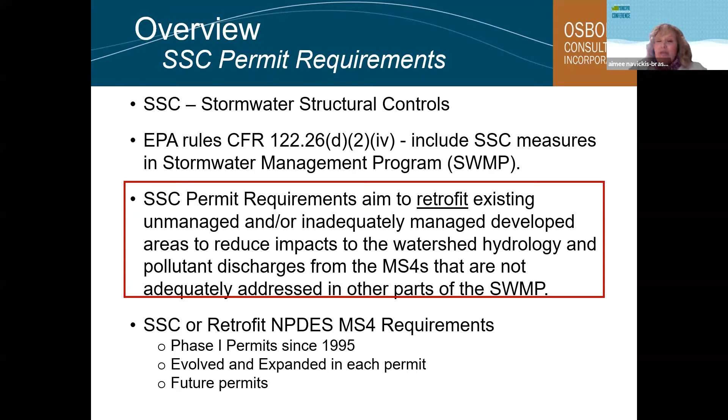So what are the SSCs exactly? There are 11 different project activity types that fall under this umbrella. These include new flow control facilities such as a detention pond, new runoff treatment facilities such as a biofiltration swale, new LID BMPs like porous pavement, and retrofitting of existing treatment and/or flow control facilities.

So retrofitting one of the three items listed there - a flow control facility, a runoff treatment, or an LID BMP. The first 4 SSCs listed are all ones you would find in the Stormwater Management Manual, which has guidance for developing them.

The other categories include number 5, property acquisition for water quality or flow control benefits, maintenance with capital construction costs greater than $25,000, restoration of a riparian buffer or forest cover area, some type of floodplain reconnection projects - as long as it's not to a flow control exempt water body - and permanent removal of an impervious surface.

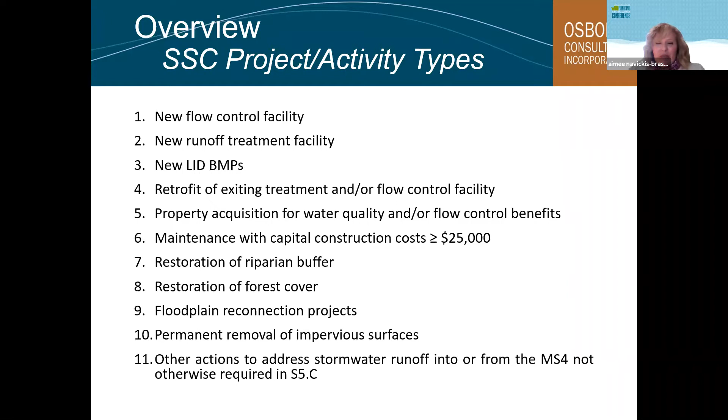And the last category is 'other.' Those are actions to address stormwater runoff into or from the MS4 that are not otherwise required by the S5C section in the phase 1 permit, which controls runoff from new development, redevelopment, and construction sites.

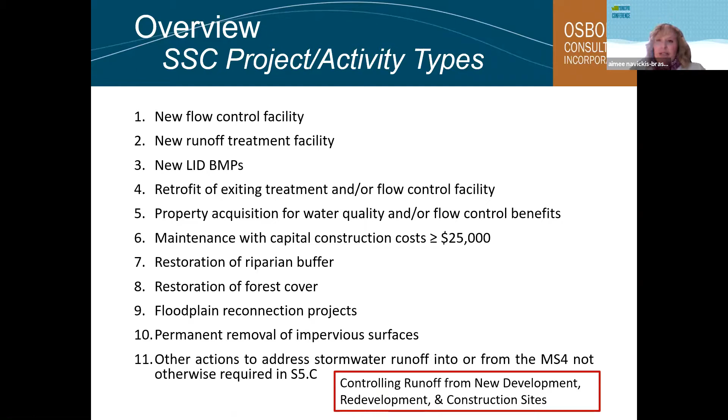So last slide on the background and overview related to SSC points and multipliers. In the phase 1 permit, specifically Appendix 12, there are requirements that define specific items related to the SSCs, including reporting instructions for how permittees are to document the work they've done to meet this requirement and the progress they're making each year.

There's also a section that defines the project types for each category, and provides some type of definition for each of them that includes a definition as well as eligibility for the different SSC requirements. There's also information about non-qualifying projects, which won't get you the points you need to meet your permit requirements. Most of these are activities that would occur below the ordinary high water mark.

And then there's instructions for calculating points. Specific to the project type, there's a multiplier that's applied, and then some type of measure, such as equivalent area, length, or area, is applied.

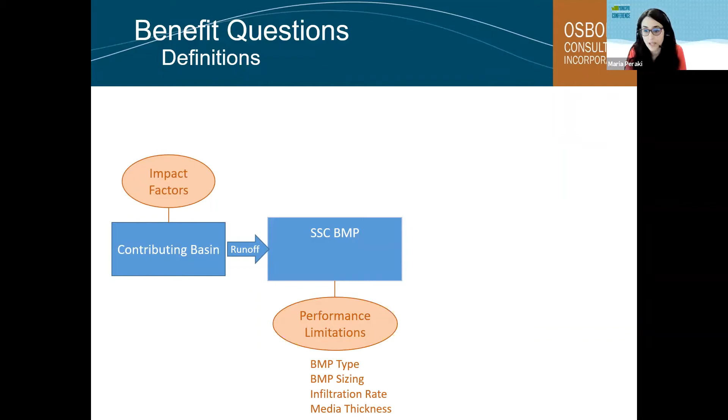The SSC BMP has associated with it certain performance limitations, and those could be the BMP type, the BMP sizing, infiltration rate for LID BMPs, and the media thickness. Those are just examples of the design parameters that could influence the stormwater-related benefit of the SSC.

Each SSC BMP involves certain mechanisms that are the flow control or treatment processes that provide the benefit. And those mechanisms can include sedimentation, filtration, adsorption, among others.

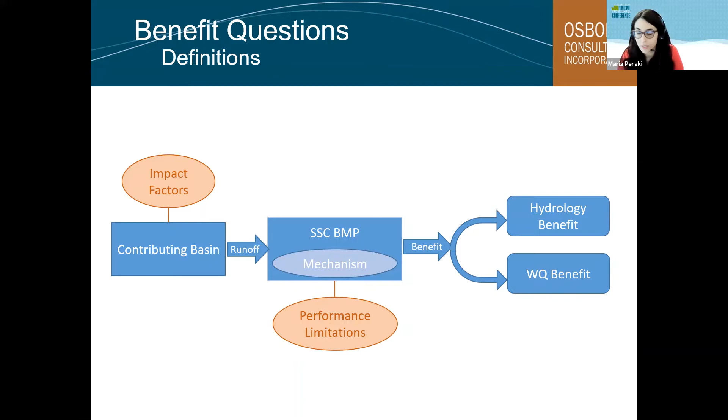The SSC produces a certain benefit, which then could be split into the stormwater-related benefit, which includes the hydrology benefit or the water quality benefit, or other environmental benefit, examples of which are groundwater recharge and air quality improvement. For the benefit, there are certain single or combined variables that can be used to measure it. For this analysis, we're going to be using performance indicators to estimate the stormwater-related benefit of each SSC.

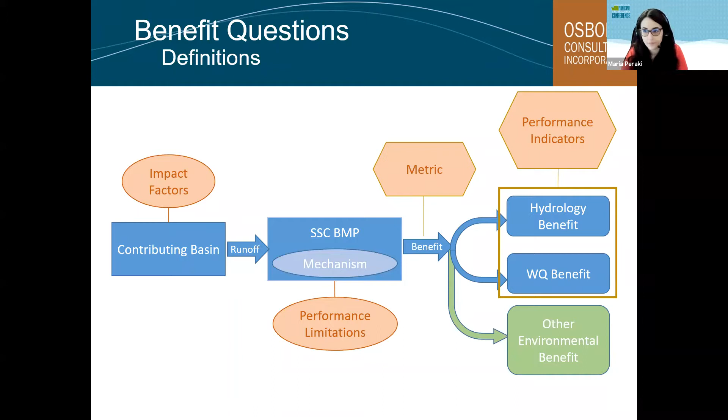Sorry, I'm one step behind you because I'm looking at the other screen. Next slide, sorry. That's fine.

The consultant team was asked to provide responses for 7 benefit questions split into 2 main groups. The first relates to the SSC stormwater environmental benefit, mainly defining and quantifying it. The second relates to metrics for the stormwater related benefit, revolving around metric applicability under different site conditions or impact factors, limitations of the metrics, single versus multiple metrics approach, best metric, and a potential approach for comparable benefit through metrics.

In order to respond to those questions, the consultant team conducted a literature search, and I'm going to outline the approach and findings in the next slides.

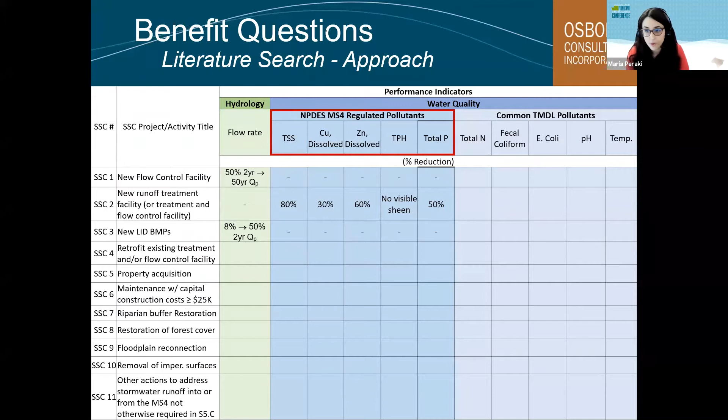In order to gather all the data for the performance indicators for each SSC, we created a table like the one we're showing here. We focused on performance indicators for hydrology and water quality, and split the water quality performance indicators into parameters regulated by the NPDES MS4 permit and common TMDL pollutants.

For SSCs 1 through 3, a decision was made after coordination with the TAC group to use the ecology-approved performance standards, the SWMM standards, and not perform a literature search for those parameters. The consultant focused the literature search effort on finding performance indicators for SSCs 1 through 3 for the common TMDL pollutants, and for all the parameters for SSCs 4 through 11.

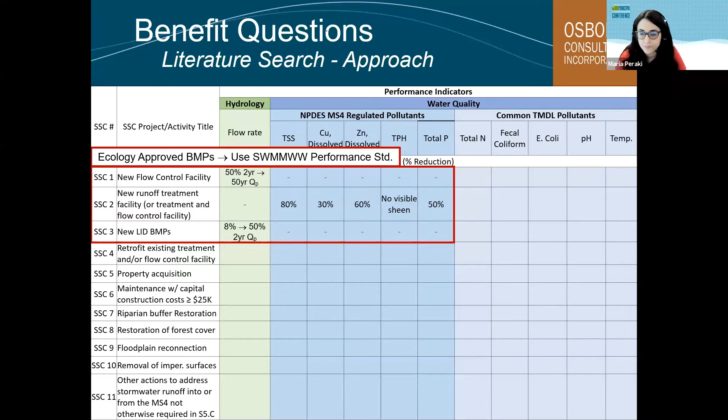To keep the literature search on track, we created a template that all consultant team members used to gather data, ensuring the same amount of data was gathered from every team. A planned approach was also outlined so that whatever data we collect are comparable among themselves, but also comparable to what we would get from BMPs in Western Washington.

In order to achieve that, we developed 4 criteria. The first is we wanted to give priority to Western Washington studies or studies with similar conditions. The next was we were trying to identify impact factors and how those would influence the results, so we can achieve transferability of data and results.

We were also trying to focus on studies that followed a research protocol similar to TAPE. And lastly, for BMPs, we were trying to use BMP comparables to Western Washington BMPs. I'm going to talk a little bit more about the last 2 criteria in the next slides.

In this slide, we have a bar chart from data collected from the International Stormwater BMP database. We have the frequency of certain percent reduction ranges, and on the x-axis, we have the influent concentration, which is a very important TAPE parameter. To the far left we have all the data, and then we have buckets based on range of influent concentration.

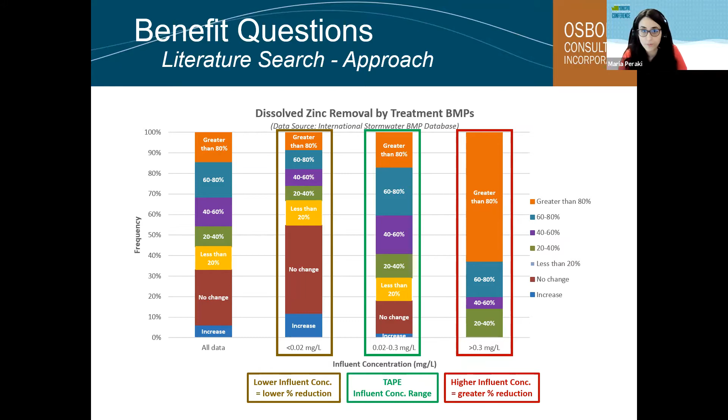So the next step was to actually review the research. First we conducted some interviews with permittees and ecology, and we also reviewed the phase 1 annual reports in order to focus a literature search to conditions and practices applicable for Western Washington.

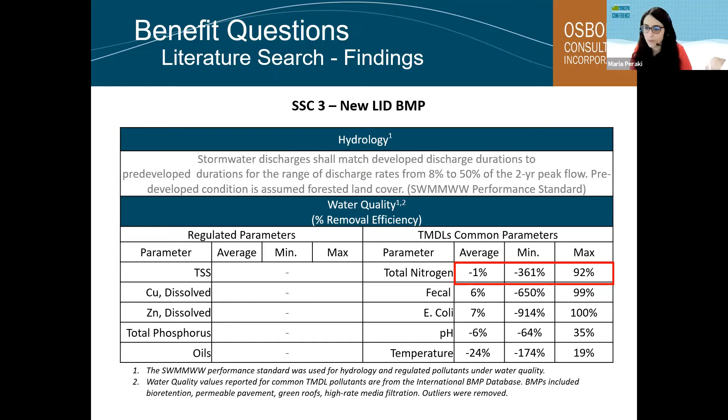So moving into the next slide, here's a table that shows results and performance indicators for total nitrogen reduction for different BMPs that fall under the SSC categories 1 through 3.

If we focus on two BMP types that fall under SSC3, that will be the porous pavement and the high rate biofiltration. You see for the porous pavement, we got an average reduction of -150%, so severe leaching, and for high rate biofiltration, we got an average of 34%, so we actually had reduction. These are two BMPs falling under the SSC3 type of projects.

And we see what's the wide range of results that we're getting. So that has contributed to having a very wide range of results and reduction for each SSC type, especially the ones under 2 and 3.

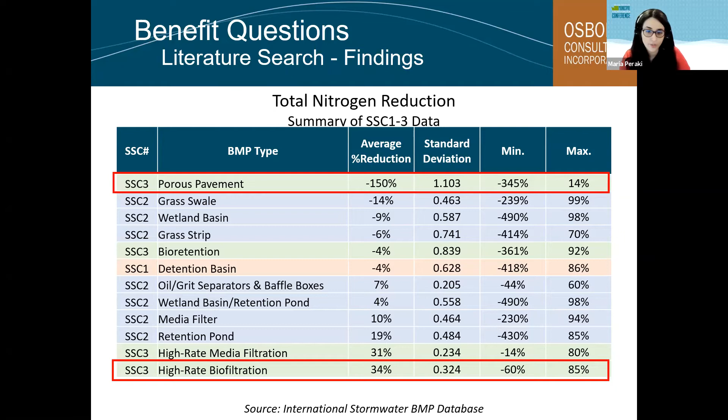Another interesting example was that of the SSC5 property acquisition. We actually were not able to locate any research on stormwater-related benefits for land protected from development. So we switched our approach to show a prevented impact on the environment based on switching from land that is protected to land that is developed for commercial, industrial, or residential use.

We used monitoring data for open space since we weren't able to locate runoff data for forest land. So basically these percentages are showing prevented impacts, not percent reduction. For example, if we were to change the land use from open space to commercial, we would expect to see an average of 34% increase in TSS. The same approach was followed for SSC 10 as well, which is removal of impervious area.

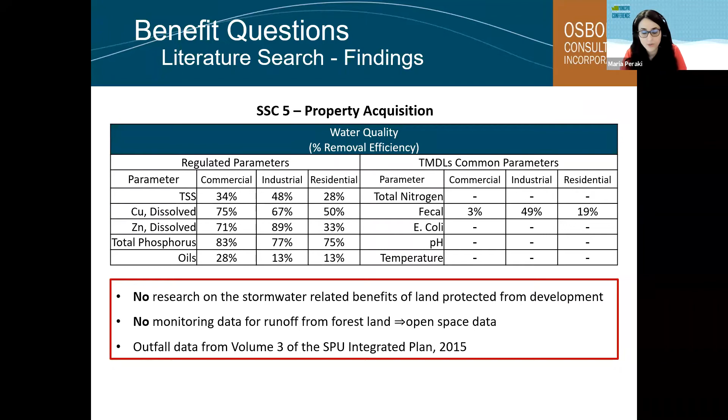In order to showcase the data that we found and the data gaps that were identified, we're going to use this table. It's similar to the one that I showed you at the beginning. Instead of filling it out with percentages, we decided to go with a color scheme that is going to make it easy for you to follow the data availability and the data gaps.

We're going to start by highlighting the cells for the SSCs and performance indicators that we have as non-applicable. For example, the new flow control facility is not applicable to have a performance indicator for the NPDES water quality parameters, because it's not approved to provide that benefit. We're also showing the SWMM standards that we used, for example, for the new LID BMPs, we use the SWMMWW standard for hydrology.

Next, we move on to show performance indicators that were calculated using sample sizes greater than 10, and in most cases greater than 100. That was the case for the data that we collected from the international BMP database, where we were at the range of above 1,000 in some cases, and that is mostly for SSCs 1 through 3 and the common TMDL parameters.

Moving on, next we have sample sizes less than 10. So we found some studies that had sufficient data, but still if there is potential to improve on those results because the sample size was so small.

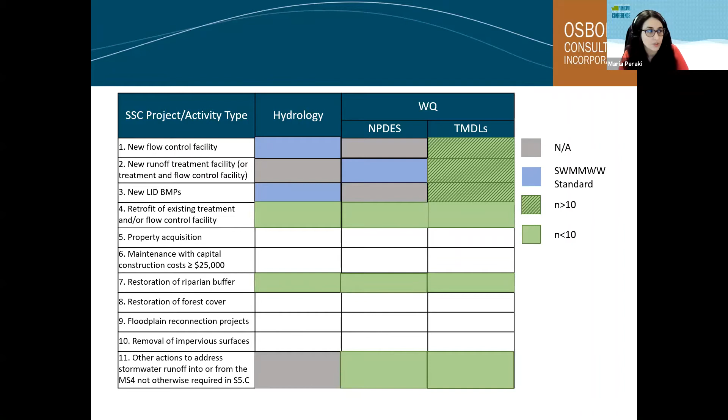Moving on next, we've located no studies for those SSC types, but we use substitute data, as I mentioned before, for property acquisition and for removal of impervious surface. The restoration of forest cover was a similar case. We didn't find any actual studies for that, but there are some ways where you can approximate the benefit based on the amount of trees that you're planting.

And lastly, the data gaps. These were SSCs for which we were not able to find any information to quantify the benefit or even approximate it.

Just to sum up, the main issue with the literature search was that, one, a lot of the research out there is not set up to answer the questions that we were asked to answer. And two, in some cases, the research was set up in a way that would help us, but the details were not reported in the documents that we reviewed.

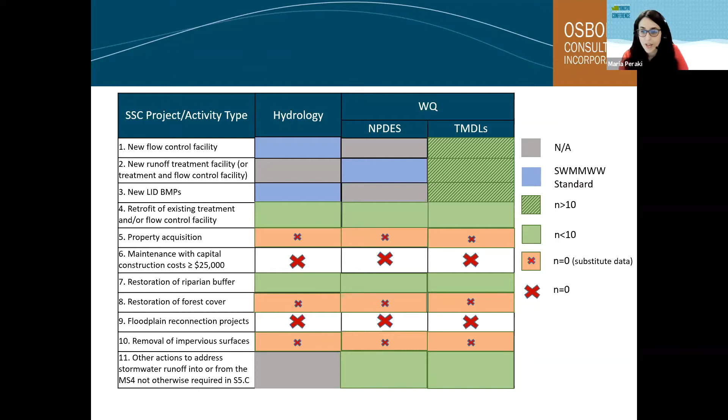So now Aimee is going to walk you through how we used all this data to answer the benefit questions.

Thank you, Maria. So I'm going to actually go through the benefit questions now. In some cases, I'll provide abbreviated responses. In some cases, I'll hit the high points of what it encompassed and give you some examples. Going through all of it in every detail would not be very much fun, so hopefully I hit the high points for you.

So we start with the first benefit question, which is: what is the most useful definition of the stormwater-related environmental benefits or impacts of each eligible SSC project activity type? So for each of the SSCs, all 11 of them, we developed a response to this. We've broken it into these categories.

We first have a definition of what the SSC is. We collected that information from the NPDES MS4 permit in Appendix 12 and also from parts of the SWMMWW manual where it's applicable. Then we also define the eligibility characteristics, which are defined from the permit in Appendix 12.

Next, we provide the SSC treatment and flow control mechanisms—that's how the SSC is providing those benefits. We define all of the mechanisms that could exist within each category. And last, we define the SSC performance limitations—the limitations of the SSC itself. If you change something about that SSC, that can actually influence the benefit you get from it.

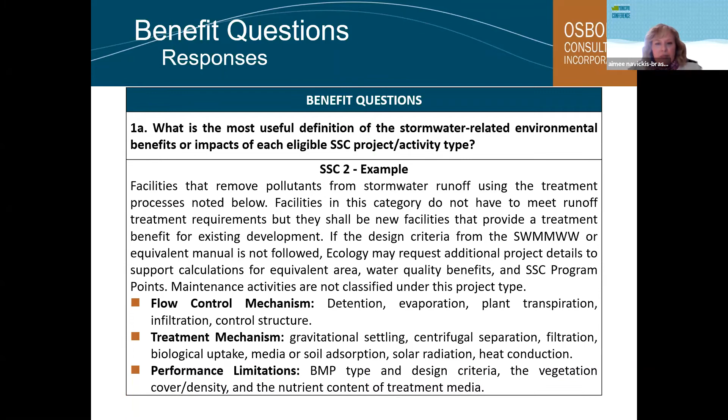So the next question that we were answering relates to how does each SSC project activity type address stormwater impacts not otherwise adequately controlled by other areas of the permit, including disturbances to watershed hydrology and discharges of pollutants in areas of existing development, including roads, and prevention of future impacts in areas of new development.

With this particular one, the first thing that's important to note is that the data we reviewed does not cover all possible conditions for us to assess how each one of these may be addressing stormwater impacts that are not in the permit itself. So to answer the question, we identified what we did find going through the literature itself.

The first one, starting with, is just addressing the SSC requirements, which is retrofit. Retrofit requirements are newer as far as having a specific amount of retrofit that needs to be done, and they are addressing impacts from existing development where currently it's not managed or it's inadequately managed.

Within the data that we reviewed, what we found is that the SSCs can provide additional benefits beyond what's required by regulated pollutants - TSS, dissolved metals, copper, zinc, total phosphorus, or total petroleum hydrocarbons. There's additional benefits beyond those, and additional flow control benefits when it's not necessarily required. And then there's the cumulative benefits of some of the preventive actions that may occur with these.

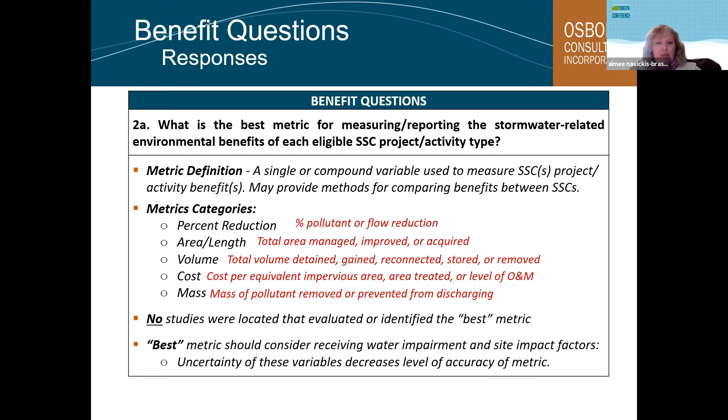Okay, anyway, the best metric we recommend after reviewing all of the literature is that it really needs to consider those unique project conditions. It needs to consider the impact factors, those contributing basin area conditions that can impact the performance of the SSC and how it affects that. And thinking about water quality impairment and the needs of the receiving water conditions, trying to match those conditions to find the best SSC for that particular project, and a metric that will best represent the benefits provided.

So next, how do land use, receiving water types, and conditions factor into quantifying the stormwater related environmental benefits? This was the first question we were not able to answer after the literature search, after we reviewed all of the available information and compiled it together. This one was not easy to answer.

In order to answer how these conditions can impact the stormwater related benefit, we would have had to have found literature that identified those impact factors within the study, providing information about the land use or other conditions occurring to help us understand how it could be impacting the two. You also need a side-by-side comparison of that type of study to understand how changing one of those variables can impact the performance. We just did not find very many studies that identify all those conditions or provided that side-by-side comparison to help us understand what's out there.

What the research does tell us is that impact factors such as pollutant sources, land use, infiltration potential, topography and land cover, and climate conditions combined can have an impact on the SSC benefits related to stormwater. So we can't quantify the influence, but what we can do is take the information in the literature and develop a qualitative influence on how those conditions can impact an SSC.

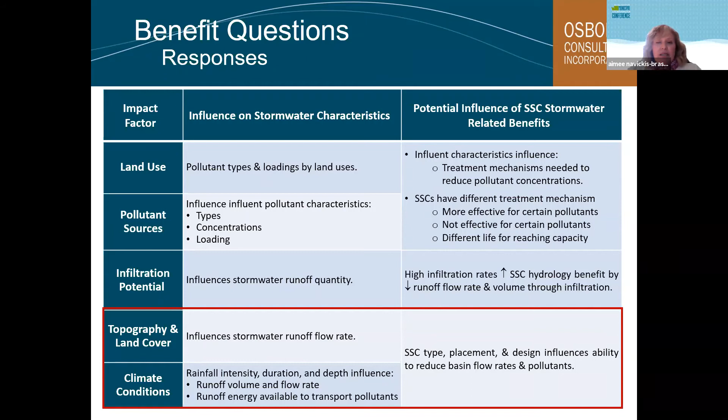The last two are topography and land cover, which can influence the stormwater runoff flow rate. If you've got impervious area and steep topography, you're going to have a faster runoff rate compared to flat topography with grass land cover. Climate conditions can also influence it—your rainfall intensity, duration, and depth can influence the volume and flow rate off of your basin area, and also the runoff energy.

That's the runoff energy available to actually transport pollutants to your SSC. So how does that influence the SSC? Well, the SSC type, placement, and design influences the ability to reduce the basin flow rates and pollutants, depending on where it's located.

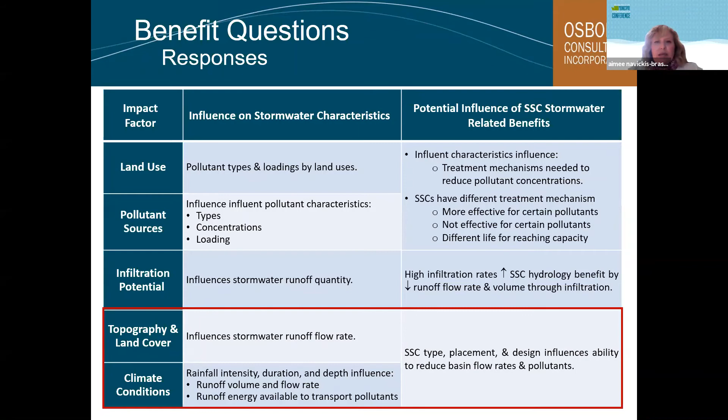Okay, I think there's two more. So then what are the limitations of metrics across the gradient of urbanization and receiving water conditions? We're talking about the gradient of urbanization, all of those different conditions—those impact factors that can affect the performance of an SSC—such as the percent impervious area, land use, soil type, land cover, all of those things, some of which we just went through on the last slide.

So many of these conditions can influence the performance, specifically pollutant reduction and flow control. For example, there was insufficient information available in the research we looked at that represents that gradient of urbanization and receiving water conditions. Sometimes it didn't provide enough information about the receiving water at all, or the receiving water conditions were provided but measured in the receiving water itself, not at the discharge point of an SSC, for example. So it was difficult to compare the information there.

But it was difficult with the information available to figure out what that gradient of urbanization is, and to really understand and determine the influence of that on the SSC performance indicators, and also to quantify the benefit between the different SSC types.